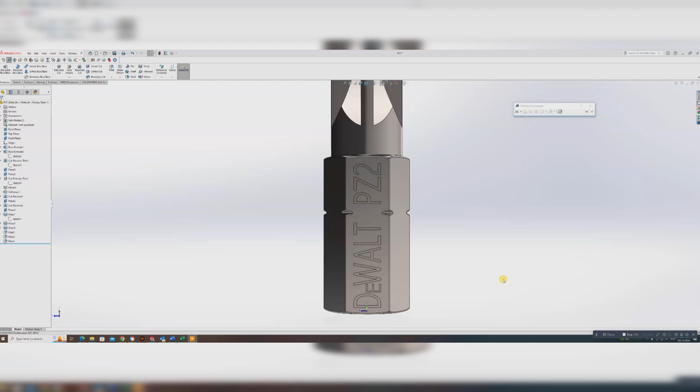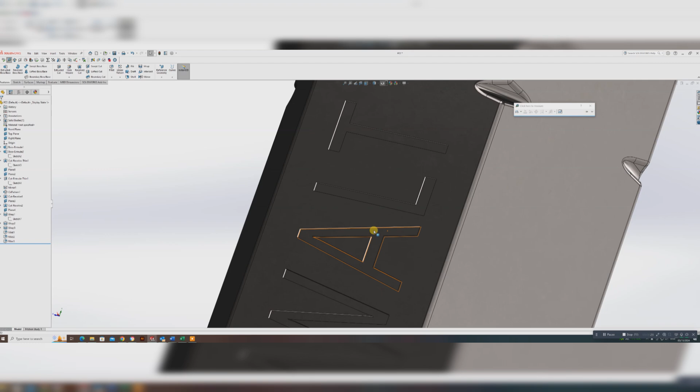Okay, next stage is to put the text in to emboss it. Emboss is to go in, deboss is to come out above the surface. So the Lego one would have been a deboss, raised lettering. I may have got that the wrong way round, but anyway, one is opposite to the other.

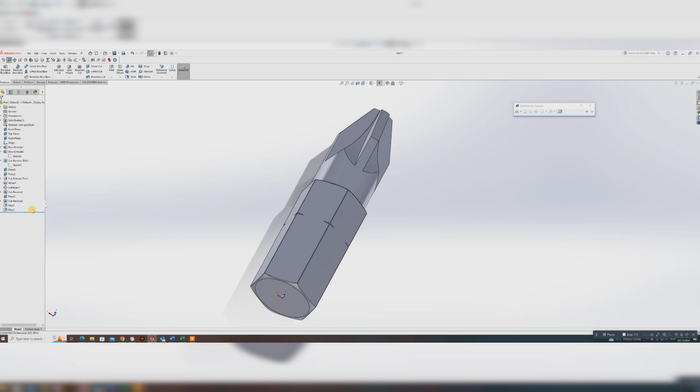So we want to try and get this into your piece. I'm just going to go to the other drawing we've got, which is this one, and I can put it on any of these faces. It's the same as the Lego, fairly simple, and there are several ways to do it, but because they've got the wrap command now, it's a lot easier to do it with that. So first things first, I need to put a sketch in.

So I'm going to sketch on that surface there. It's gone upside down again, but never mind. And I want to put in a center line. Do not put a solid line in, because it will not recognize it, or it will come out in the actual drawing itself.

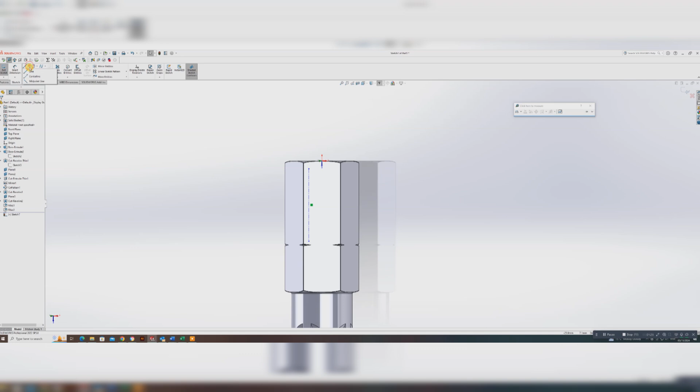So I'm just going to put a smart dimension in on this one, and I'm going to do it at 1.1. Reason being, the letters I want to put in are 2.2.

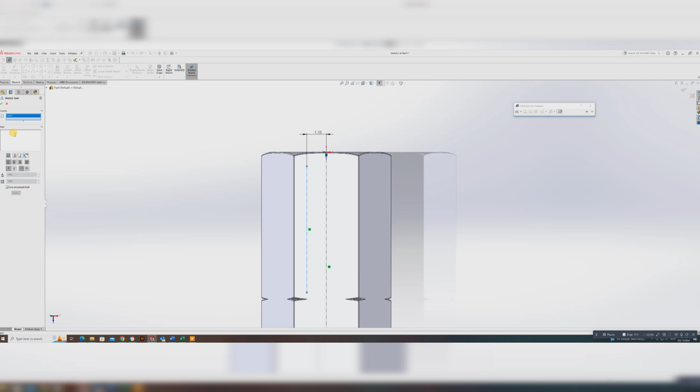So once I've got that in place, I can now go to the text tool, which is just the letter A, and it comes up with this screen here, the same as the Lego, and it asks for the curve or line I want to select. So I want to do it on that one, and I'm going to write the word 'dewalt' but without the letter E, so D space W-A-L-T. Now you can see from what's appeared it's far too big.

If I extend that line it would all go on, but I need to reduce the sizes. Now this started with the document font, so I don't want to use that, so I'm going to go onto my font database, and at the moment it's 3.5. I'm going to change that to 2.2, and you notice that's changed down again.

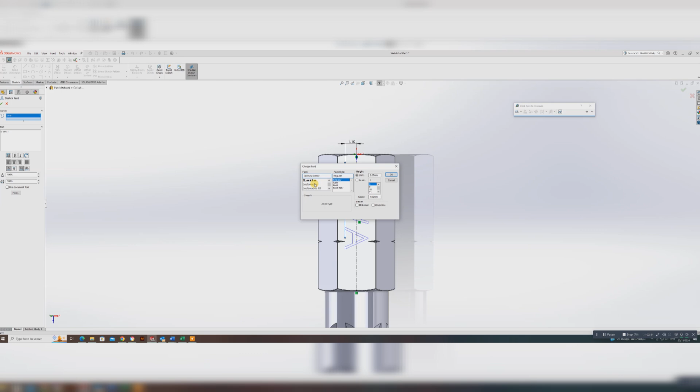I'll go back on there again because I actually want to change the font. So I'm going to go down. I found one called, I'll let you pronounce it, but it's Lee something. I still can't pronounce it. You'll find it in a second. Here we go, it does take a little bit of time to get through. K, if you're doing, that's the one I want, Leelawadee. So click on that one there.

2.2 is fine, so I'm just going to click on that. But what I need here, because it's too long, is to take that percentage down to something like 65%, and you can see it fits in perfectly.

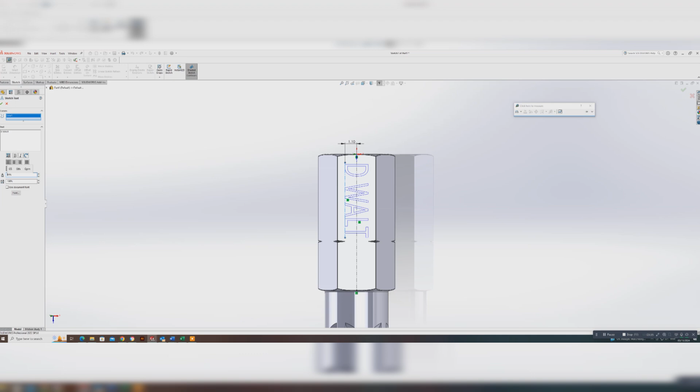If I want to adjust the rest of that, I can move this line, which I'll show you. So I'm just going to agree to that, and I'll do exactly the same thing again for the PZ2. So if I just move that line down, you'll see that jumps. And if I do that one a little bit more, nothing happens. So it's this one I need to move if I want to line up with a particular point. I can't remember what distance that is, but you'll be able to measure it.

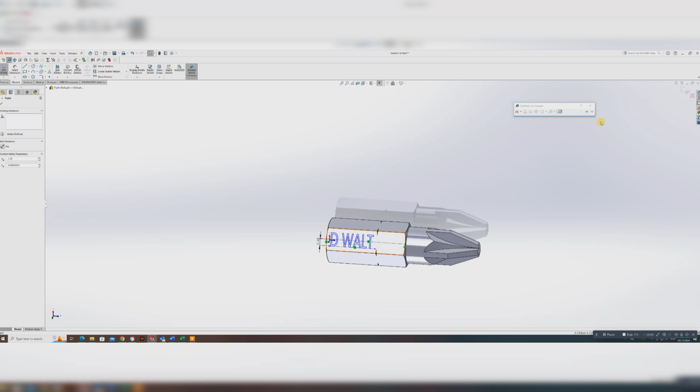So once I've got that, that's fine. So I want to get the other text in. I'll come out of this one, and then I'll go into sketch again. If I select that, it's going to select the same sketch. I'm going to draw another line in, but this time I could convert entities actually, or just draw a line.

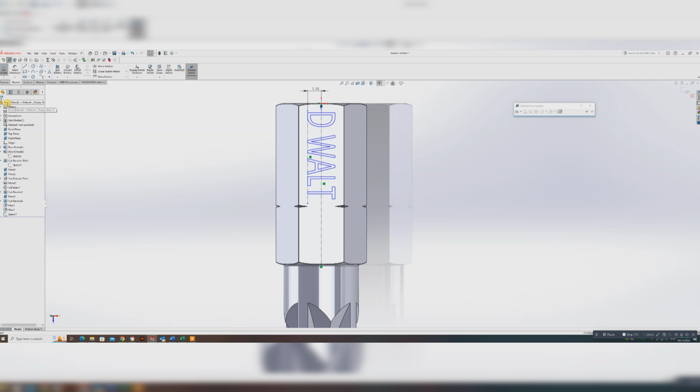I'll just convert entities, I'll select that one. Actually, it's done something a bit strange at the moment. Sketch 7, yeah, let's come out of that because it selected the previous sketch. I didn't want that to happen.

So if I go to sketch, onto here again, and if I want to see that sketch, just go onto that one. Don't know why I'm not seeing that sketch. I probably could have got this on. There we go, let's see what happens now. It is there, let's show.

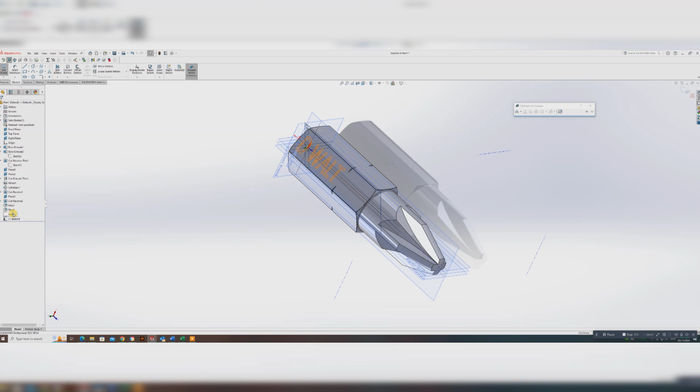So I just want to zoom in, and I want to convert that there. So I go to convert entities, just select that lower line. Okay, it goes in as solid.

Just change it, construction geometry on that, and this time I'll go to the letter and put that line again, but this time I want the letter E capital, in the same font but half the size.

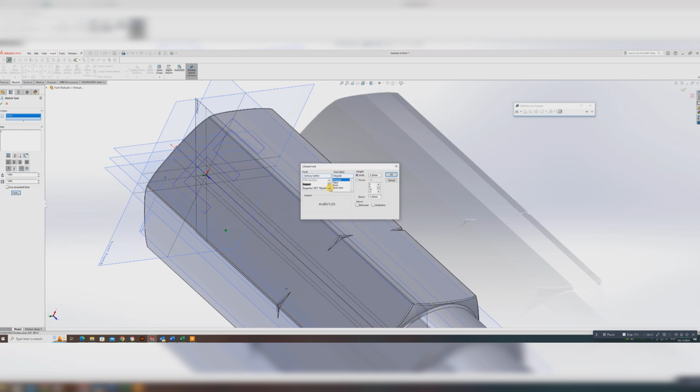So let's just scroll through. Where are you? Just go up. Not very easy, these fonts. Other packages are a lot easier to do. Just go through, it does give you time to see what's there. I mean, hollow lens wouldn't be too bad.

There we go, do that one there. But this time I'm going to put 1.1. Okay, and you can see the size there. Let's just switch those off.

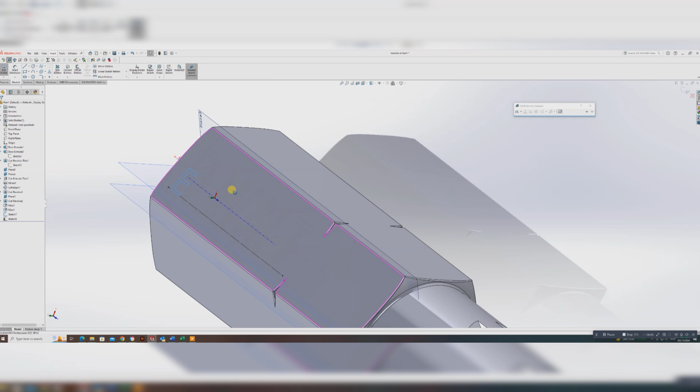So I can see what's going on, I'll give it a green tick. There we go, so you see the letter E. Now what I want to do with that letter E, I want to get it. Notice I'm picking up the dot on that line. I want to get it about halfway between, just one tiny bit more.

About there, fine, brilliant. Show you why. And if I go on to my features menu, go on to wrap.

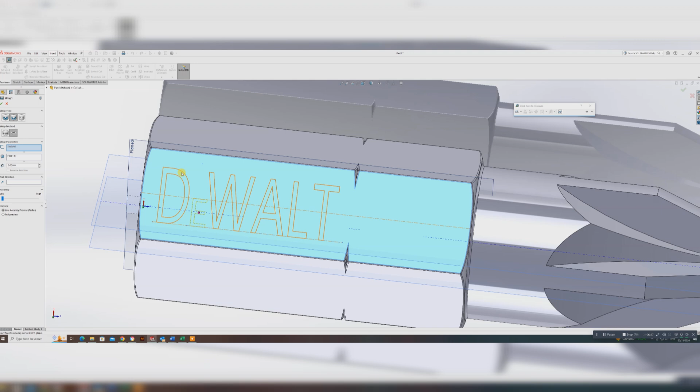Okay, it's asking me to select the face. It's already selected the sketch for that one, and it's got my previous one, 0.05. I'll give that a tick. I'm just wondering if I can actually pick up the other sketch as well. No, it's just one sketch at a time, which is a shame considering there's all that space there.

Doesn't really matter, but let's just pick up that one, in that one there. I don't even know if I hold the shift key then. No, it doesn't do it. Let's just do that, so that should take a depth there, as you can see.

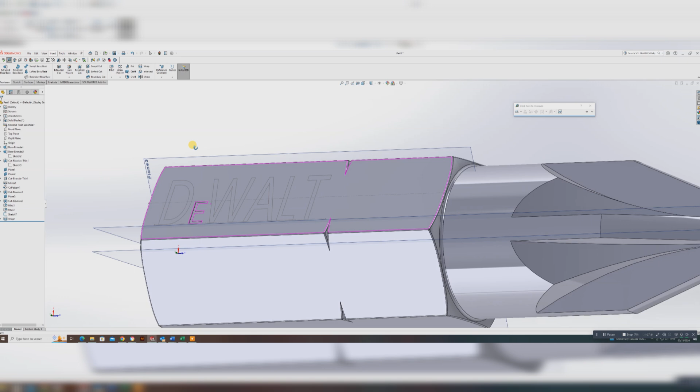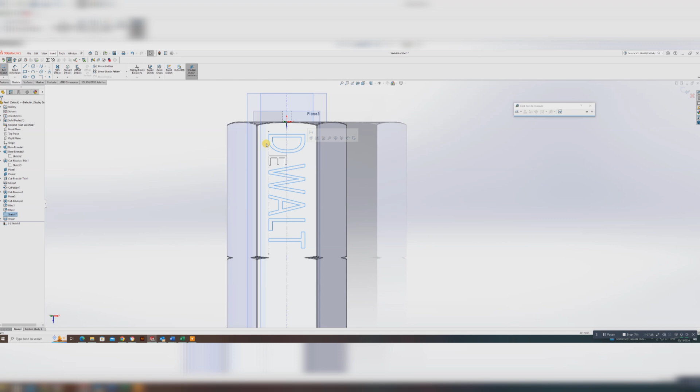It does this time, that one. Is it going to wrap? Because I'm still in the sketch. Oh, this always does this to me. Right, let's try again, so let's go to wrap.

I know why I did wrong. Let's just pick up on that previous sketch, just sketch 7. Perfect. Select the face, it's the same as before, settings are the same. Just give that a green tick.

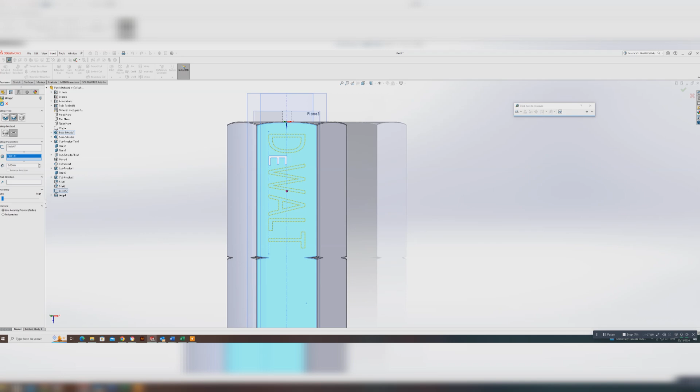So now I've got debossed. You'll probably notice on yours the T is actually halfway between those two. It's entirely up to you what you do, I just think this looks a little bit neater. And again, these are stamped in, they're not actually machined in as the rest of this is machined.

These might be extruded then turned, but I can't remember. I've got a video somewhere to show you. And what I'm going to do now is do another sketch.

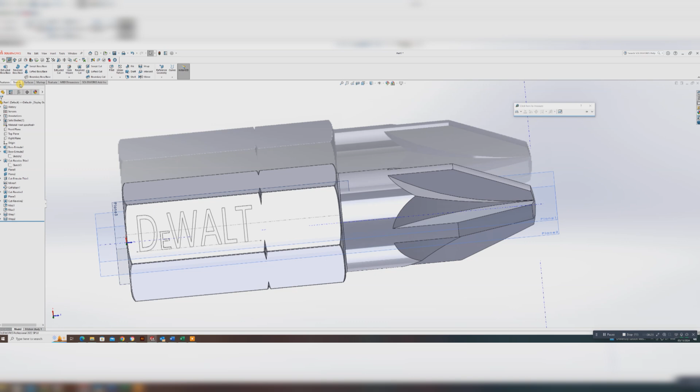On that surface, okay, and I'm going to draw a line, centre line this time. I'm going to go from about there to there. Now you'll notice I'm not doing any measurements, I'm just going to make sure that I make that collinear. It's kind of black, but just no point. And then go back to text.

And this time I'm going to do - it didn't pick up the line, it picked up the line - I'm just going to put in PZ2. Again, it's too big, so I just go on to the font I want.

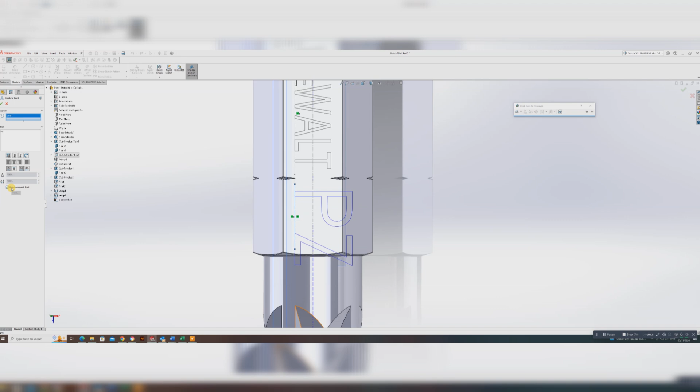Change that to PZ2. Again, notice I've got the text wrong, PZ2, okay, and I can reduce that. I just didn't check what font I used. No, Century Gothic, you can use that as well. I'll just do the same as I did before.

Let's have a look quick. Where are you? Come on. Yes, there we go.

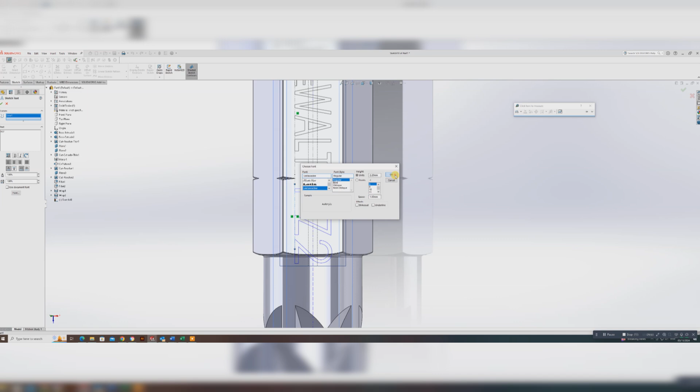Just need the dog to do some filling in time. There we go, do that one. That's fine. And then I'll reduce that down to 65% as well.

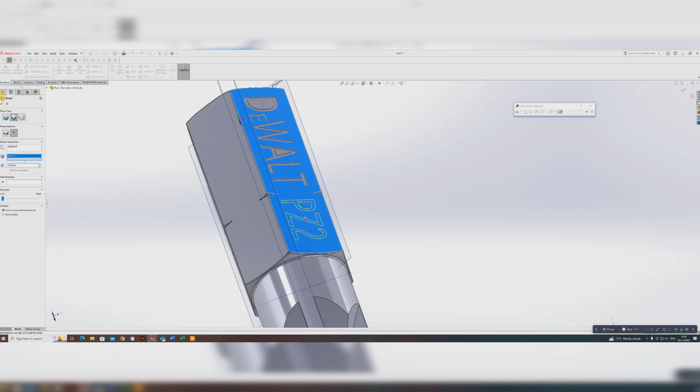As you did with the other aspect here, you just go to, as it's already highlighted, wrap. It's selected. I've just got to do the face, sorry. There we go, and give a green tick. It's all the same settings as before, and there you've got a complete part done.

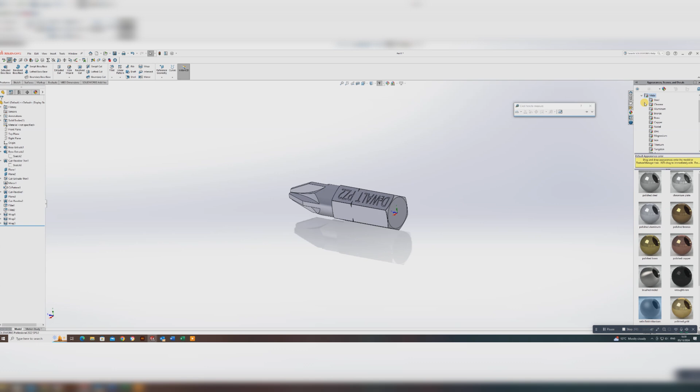While we're just here looking at this, you can add or take away different materials. If you want to change the material, which we'll go on to later, just go to the beach ball, okay, and make sure it is on the beach ball there. You've got a load of different materials you can go to. So let's just, for example, do magnesium.

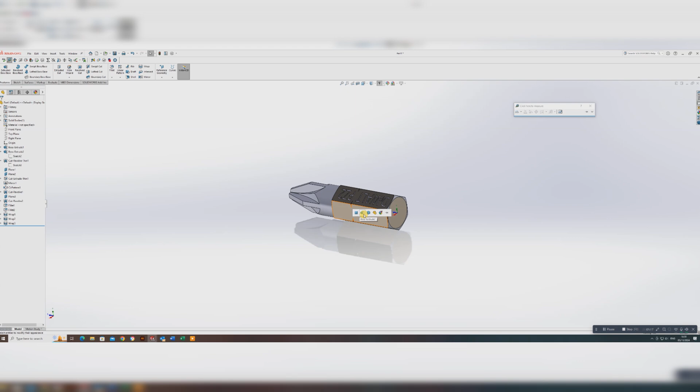I'll go into materials a lot deeper later, just look at something that looks a bit like what we're looking at. Just drag it across, drop it on, and then you've got the body itself or the part. These two really are kind of the same unless you've got two parts in there. That's just sort of the face, and then that's the corresponding faces on that. Just do it on part, then you have quite a nice part finished there.

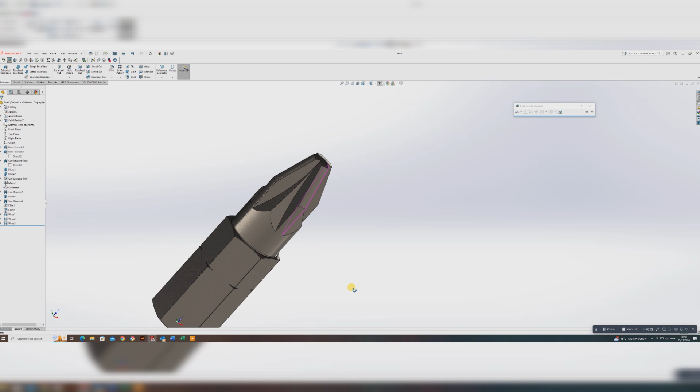But if you wanted to change that, just to show you, if I go into that - I can't remember, we were on magnesium - if I go to a smooth magnesium, almost brushed where it's been cut, and just drop that onto there, onto the face, it looks as though it's been machined. And what I can do, if I right hand click and go to copy appearance, I can do that and go paste appearance, and it will do all the faces that I require with that. So it's just a little differentiation from the kind of standard bits and pieces you would do.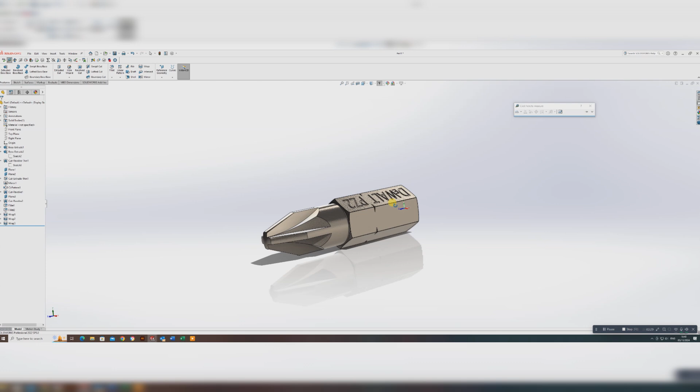Also up here, if you really want to play around, you can put it into perspective, gives it a better view. Ambient occlusion, a little bit of shadow, shade, etc, so it just has a bit more reality. There is a rendering package to this, which I will go through probably next semester, which actually gives you a photorealistic finish to it. But for now, I think that's absolutely fine.

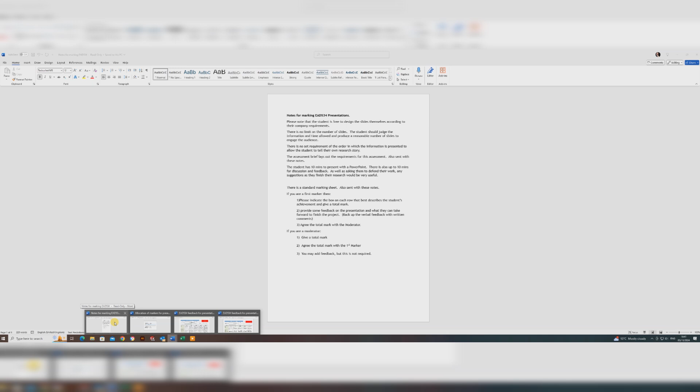If you want to change the background colour, just click on the scene button. I tend to go for plain white, like that. And if you do a Control-C, that copies it to your clipboard. If I just open up a blank Word document - just ignore what you're seeing on screen at the moment - what I can do is Control-V, and that should bring it in. It's not going to, of course. I'll tell you what, the other way to do this...

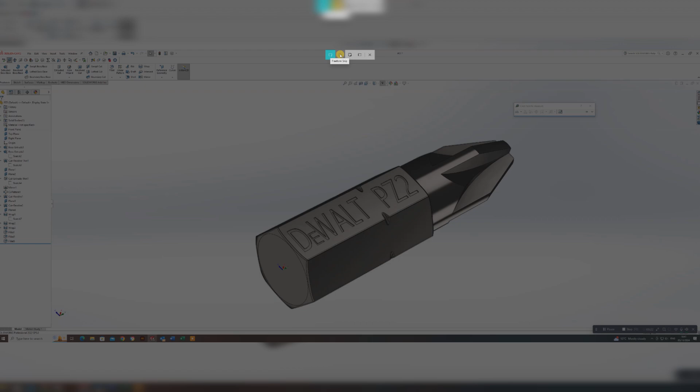Just one second. If I go back to that page I was on, let's do that and then go to print screen on my keyboard, which it's done. Freeform snip, let's do that - this really is new to me, I haven't seen that one before. Let's just do that bit. Okay, and let's go to the Word document, blank one, and Control-V. There we go.

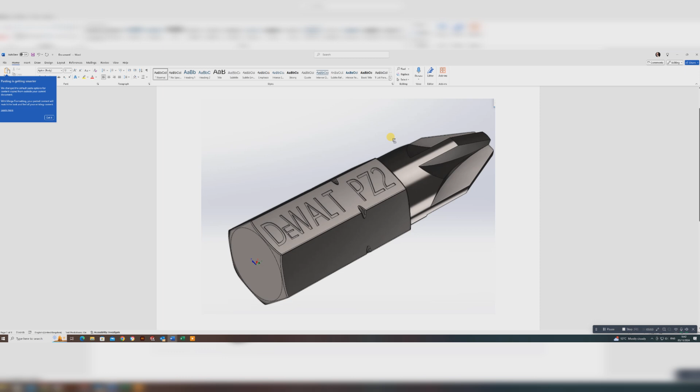But again, that's the colour side of things. Let me just see if I bring up another one - Control-Z, that one, just one more. Let's go back into the one we were playing with before, so let's do print screen, and let's just do that bit, so that's why I've got the shadow in there as well. Let's go back to my Word document up there, Control-V, and there you go.

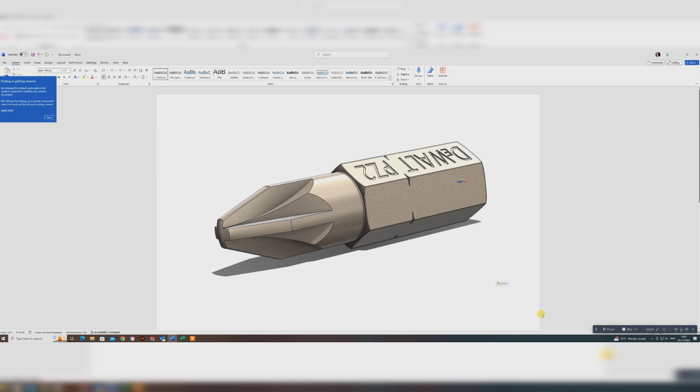It's actually a really nice picture that appears, and it actually does print out like that. So if you want to do manuals, reports, etc., you can just clip that through for whatever you want. That's just a little tidbit, as they say. Anyway, we're going to move on to the plug next, so I'll see you in a bit.